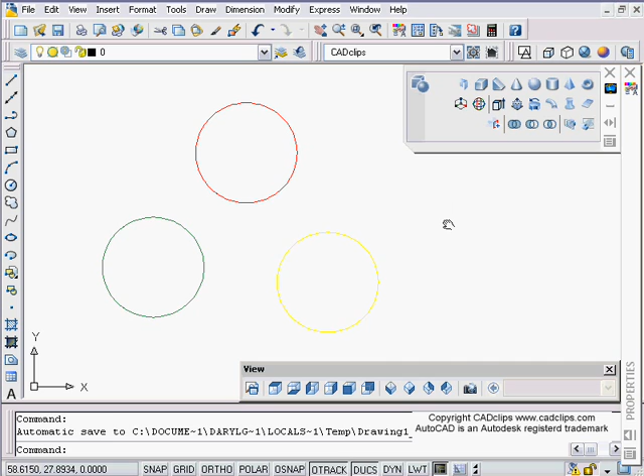I'll just get right into it. I've got some solids here. If I list this, I've got a 3D solid, it's a cylinder, and I've basically copied it 3 times. All I've done here is change the properties, change the color of these objects just so they stand out a little bit. Nothing fancy there.

Then I can go into a 3D view and change my visual styles as I please, and all I'm going to do is, using shift middle mouse button, orbit around here. I'm going to cause these objects to kind of interfere with each other.

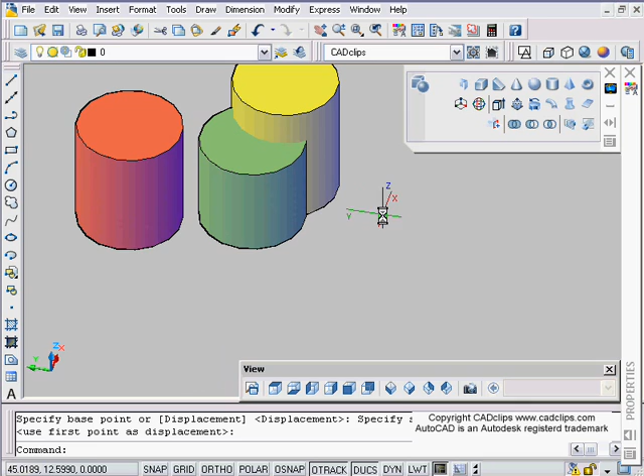So I'm going to take this, and now that I can do this in 3D and know where I am, I can say okay, I'm going to move that one over there, and then take this guy and move that guy over there. I can go back into my wireframe if I want.

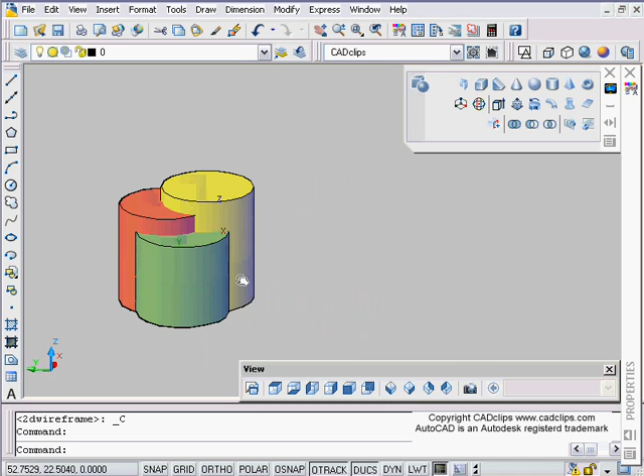I can go back and look from the top. I've got some areas that interfere. So all I can do is go back to a 3D view, maybe change my view to get something a little more conducive to the eye, and then now I'm going to use my interference checking by starting off.

Now I need to go into here, by the way, and expand this down. If you don't see this, there's our interference checking icon.

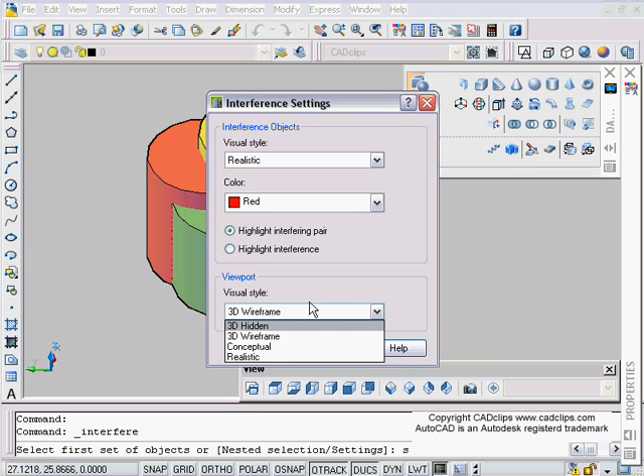We click on this, we read our command line, and it says select the first set of objects. Then there's an S for settings, and we can type S for settings, and say how it's going to display. We're going to see that a little bit later, and also it's going to show the visual style, how we want it to display. 3D wireframe is actually good, and you'll see why. So just a couple things there under settings.

All I'm going to do is pick this yellow guy and hit enter. Select second set of objects, it says. So I'm going to pick these 2 guys here and hit enter, and it bumps me into a wireframe, as I had mentioned earlier. Now from inside of here, I can pan this stuff around and zoom around if I want. Maybe auto hide that.

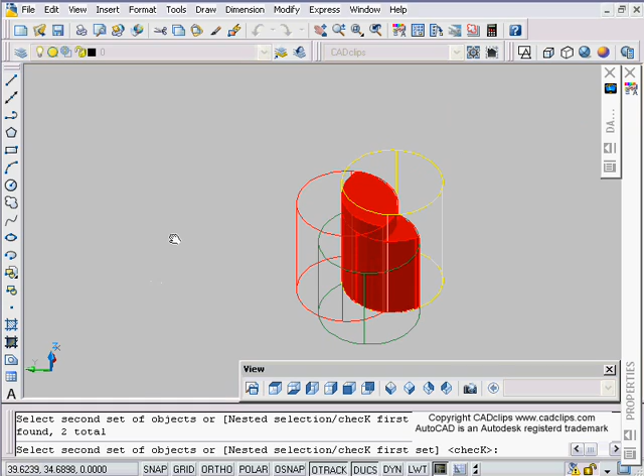As soon as I hit escape, my interference checking dialog box comes back, and now what I can do is say next and next, etc.

Zoom to pair. If I take the zoom button off, now what happens is, if I go back into here, for instance, pan, I can zoom out, move that off to the side, hit escape, and now when I go next, next, next, it's going to find previous, those objects.

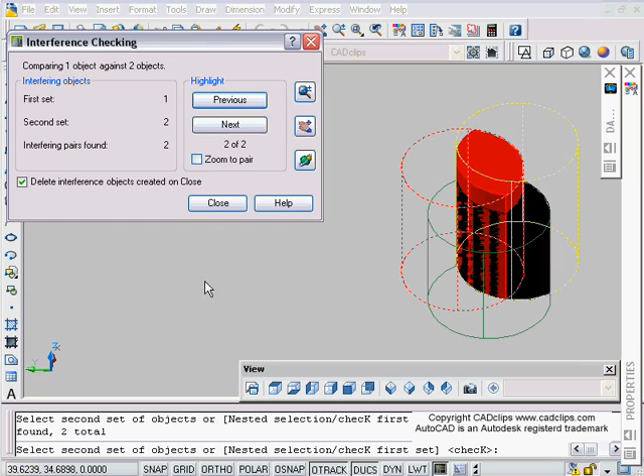Now when I close this off, it can make actual solid objects out of the interference areas. There's 2 sets of interference objects. So delete interference objects -- I'm going to take that off, which means don't delete them, which means create them. And then I'm going to hit close. That's it, the job is now done.

Now if I say M for move and I hover around, guess what? I can move that one out, and then M for move again, pick and slide that one out. And those are my interference objects. So you can do that with all different types of solids.

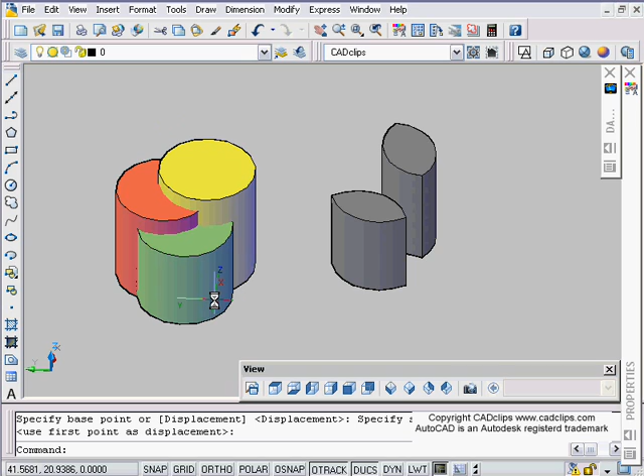Back to my dashboard. Maybe take my auto hide off once again. Now maybe I will pick this one, enter, and then I'll pick these 2 to compare, enter. I can get inside of there, zoom to pair, etc.

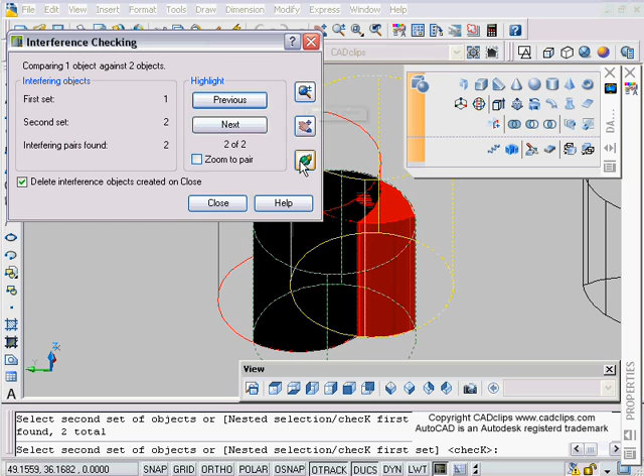Previous, next, next, etc. Use your zoom buttons over here. It's not complicated. Take your delete off, hit close, M for move. Pick this guy, move him over, M for move again.

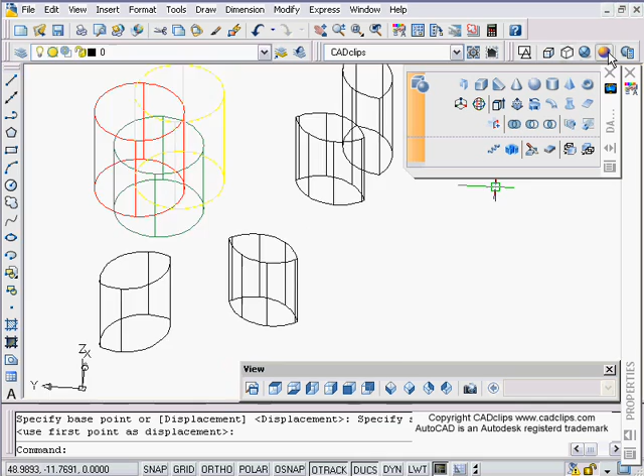Oh, and then maybe that's getting cumbersome. I'll switch to wireframe, and then it might be easier to grab that little guy that I created and move him over there. So it's up to you how you do it.

All it does is compare the objects, and it gives you 2 sets to compare, and then it makes the interference objects, and that's about it. Easy peasy.